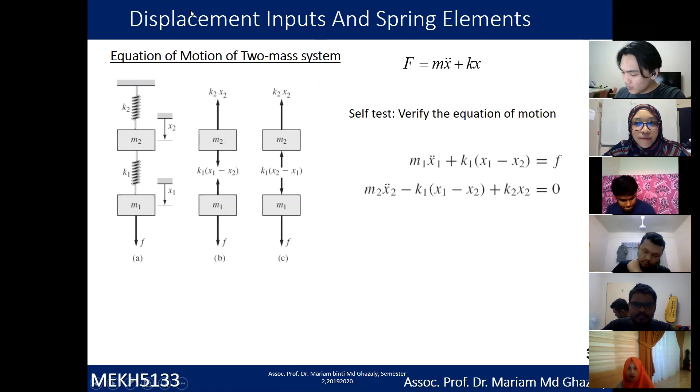Okay, since just now some of you commented that you already learned this in the previous class with Dr. Fiza, that's good. I will be very fast right now.

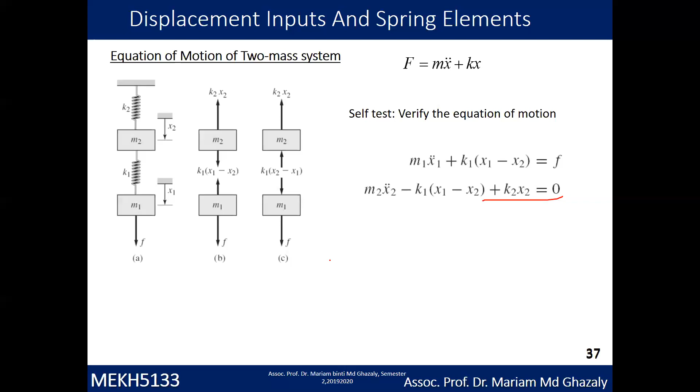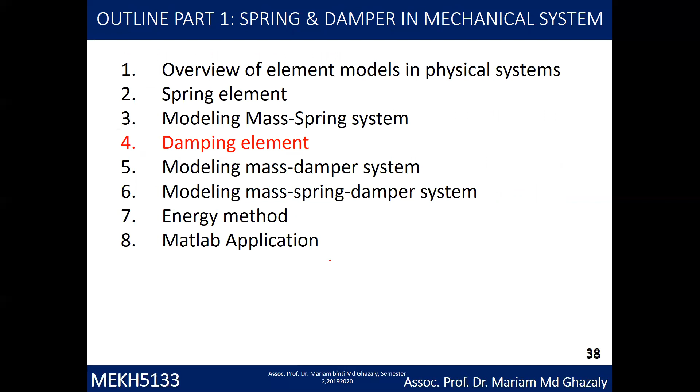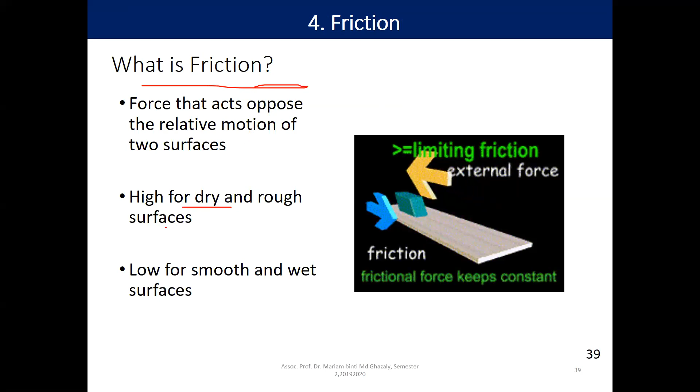Okay, so now we go to the damping element. That one just now was mass and spring; now we go to damping. But before that, let's talk about friction. What is friction? When you have damping, you actually have friction, because when an object is moving, friction slows down the object's motion—that's what we call damping. It's a force that acts opposite to the relative motion of two surfaces, whether dry and rough, or smooth and wet. So let's say you have this mass object M, and you apply a force in this direction; the opposite of this applied force is the friction force.

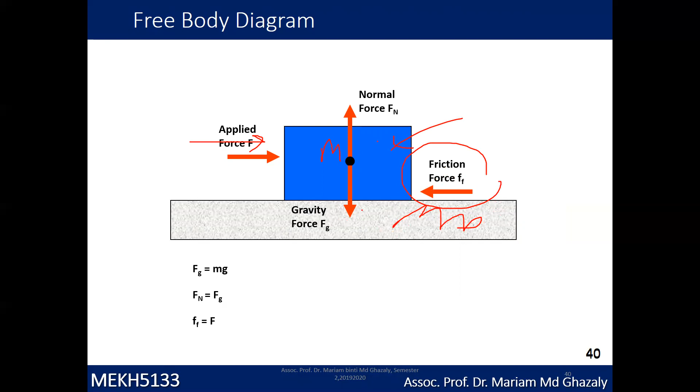Normally when you model this equation, you have a mass and a base, and we normally assume that friction is 0. But in reality you have the damping value, which is the friction force, along with the normal force acting upward and gravity acting downward. To calculate the friction force, Fs equals Fn, the normal force, times mu s, where mu s is the coefficient of static friction.

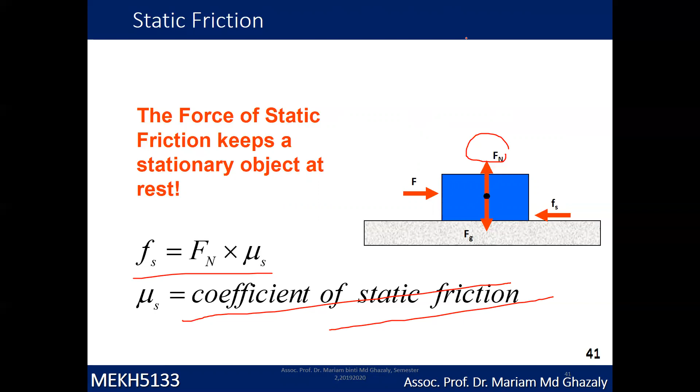So what is actually static friction? The force of static friction keeps the object at rest. For example, you have this duster. If you put it on the table, it's not moving because you have the static friction there. And in comparison, you have the kinetic force or kinetic friction.

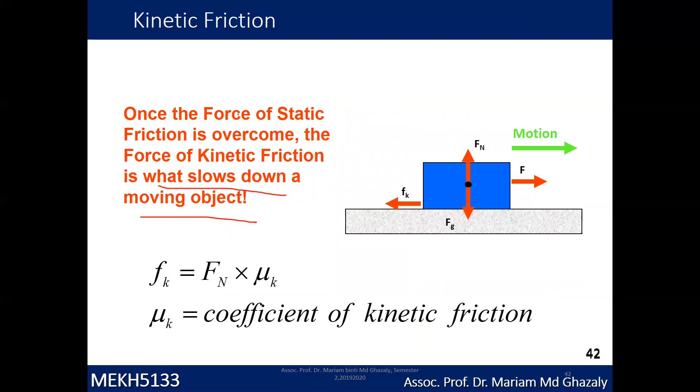Kinetic friction is something that will slow down a moving object. So, for example, you are doing a simple experiment right now. You have a box, you try to pull it. In the beginning, between the box and the surface, you have static friction. Then after you overcome the static friction, you have kinetic friction, which is when it starts to move.

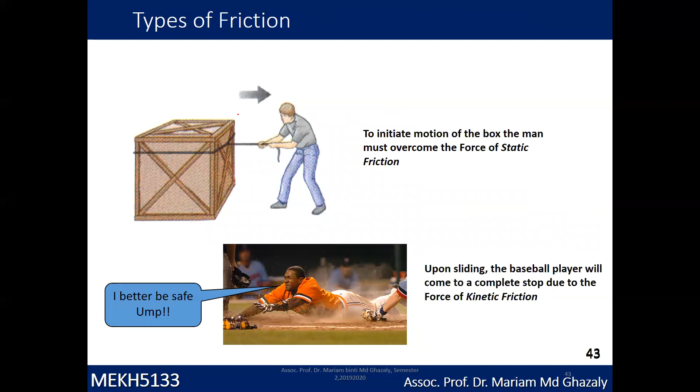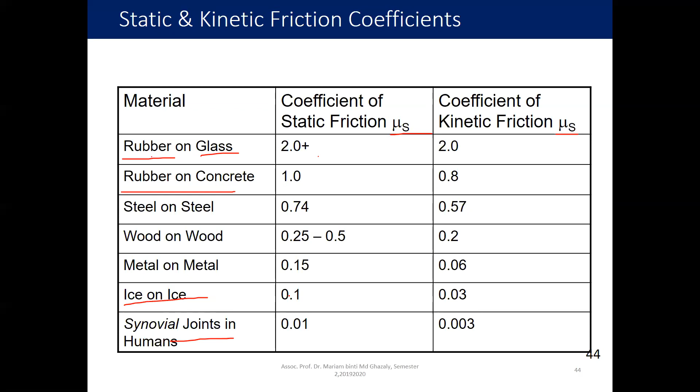Right, just a little bit of introduction. Okay, just tap that one.

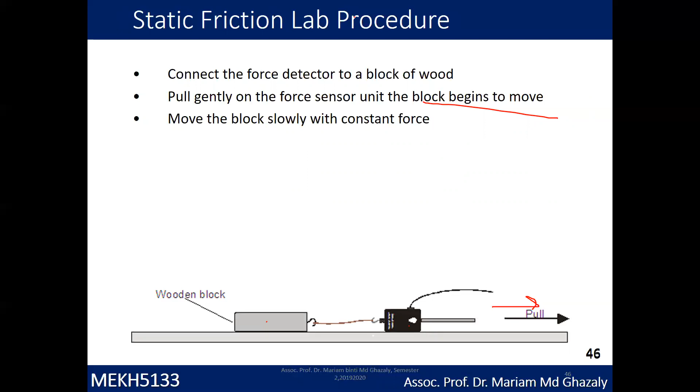So this is just a bit of procedure on how to actually measure static friction. You connect the wood block to a sensor, a force sensor. Pull the force sensor gently to the right side until the unit begins to move. So it means you pull it until it starts to move. Move the block slowly with constant force, until it starts to slowly move at a constant speed.

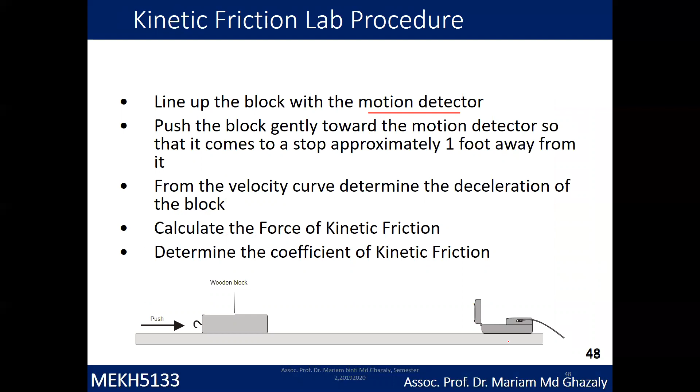So this is another way to find out the friction coefficient by using a displacement sensor. They use the motion detector to detect the speed of the block, and then from there you can plot the result and do some calculation to find the coefficient of friction.

Right, so for the damping element, I think I will go very fast - you can read it. This description: a damping element is an element that resists relative velocity across it. An example of a damping element is this piston. Normally a piston you either use hydraulic inside or you have air.

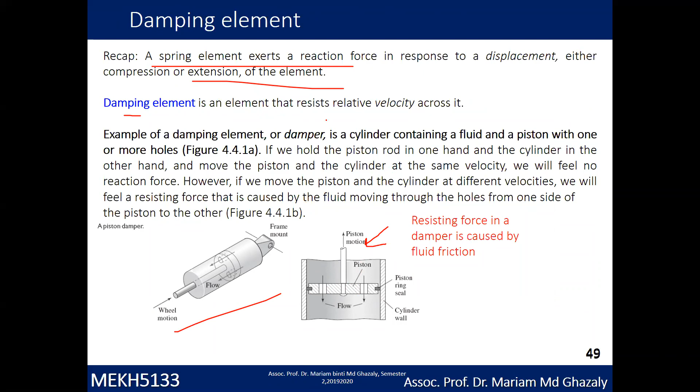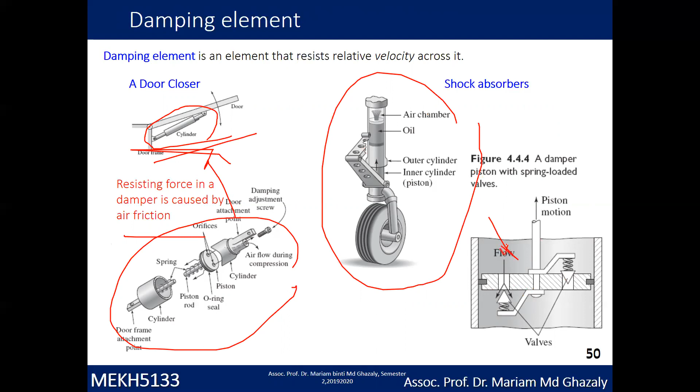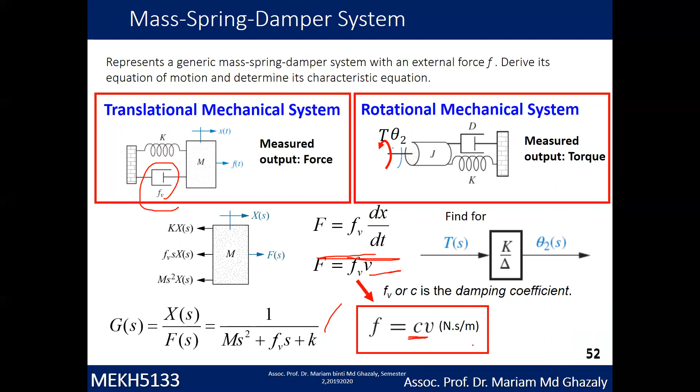So we have this equation, and from here we can actually write out the transfer function. And from here, if you take out this denominator and down here, you find this is the characteristic equation. From here, from the characteristic equation, you see that this is actually a complex conjugate root. Meaning that if it's a complex root, it's a damped sinusoidal function - meaning that if you give an input, it's going to have an oscillation before it settles down to the steady state.

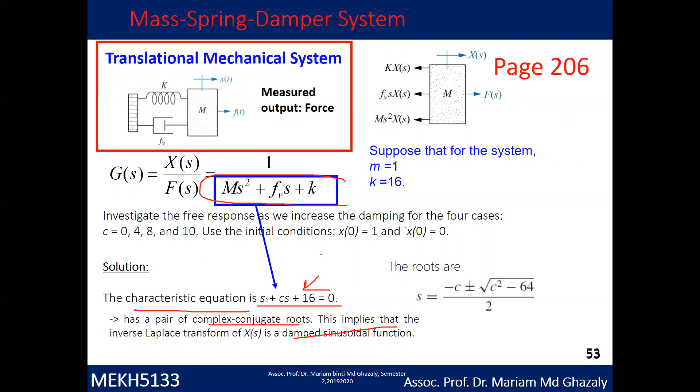So let's go to this example, I'll go very fast. So you have mass K and C, and this equation: m x double dot plus b, or we use c here,

cx dot plus kx. So you get its equation. From here you can rearrange it to get f equal to mx. So you will get the transfer function for the system, output over input, which is 1 over ms squared plus cs plus k.

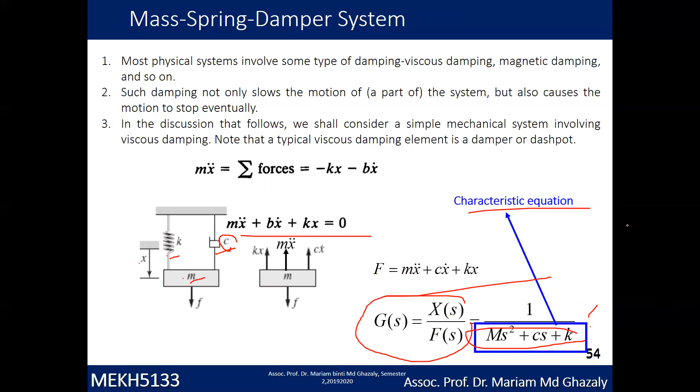So this will be the equation, and the denominator part is the characteristic equation, where you can see if it's going to have a damping value and so on. And this one will be the effect of gravity. When you have the effect of gravity, you have the theta value. So similar to the mass spring value just now, you can derive it.

Then you get this equation, mv dot, assuming that mx squared or mx double dot equal to mv dot, so you get mv dot. It's the same, I just write it in a different way. This one is in differential equation, this is in state space. So you have mv dot plus cv equal to mg sin theta.

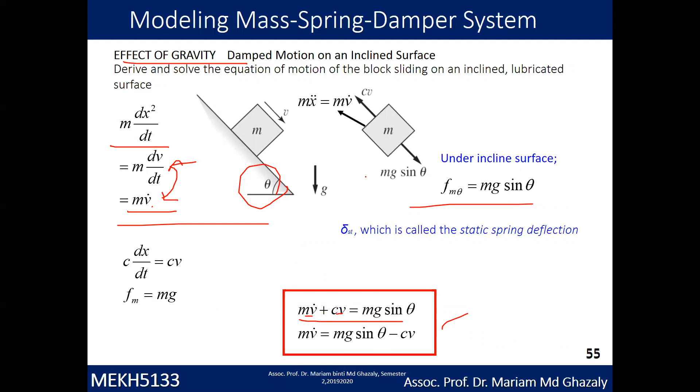Okay, for this transformation, let's go to this slide: effect of damping. So we are going to see what is the effect of damping to a system. Suppose that system shown below, m equal to 1, spring constant is 16.

Investigate the free response as we increase the damping for 4 cases. So C value is not given here, C equal to 0, 4, 8, 10. It asks you to get what is the response based on different C value. The initial condition given is x0 is 1 and dx over dt is 0.

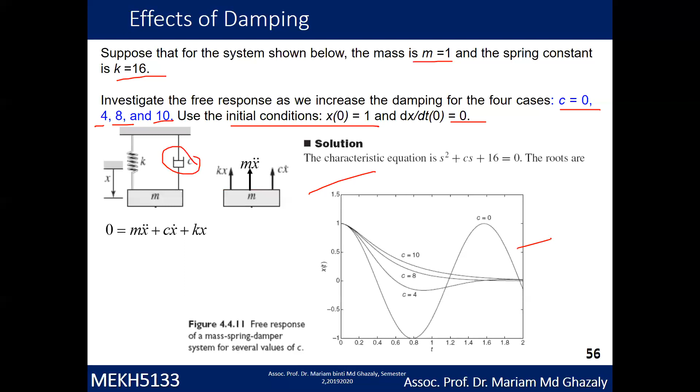So how to answer this question, this is a graph, but before we look at this graph, let's do the derivation first. By using Laplace transform and property of Laplace, you have learned with Dr. Norfiza about Laplace transform, right? So first of all, from this equation, we continue here: x double dot plus c x dot plus 16x equal to 0.

Then using the property of Laplace. So this is the property of Laplace, look at this: this is x double dot, so x double dot is this one. Substitute it: s squared xs minus sx0 minus x dot at 0, plus c value, c x dot is this one, so x, c s x minus x0, plus

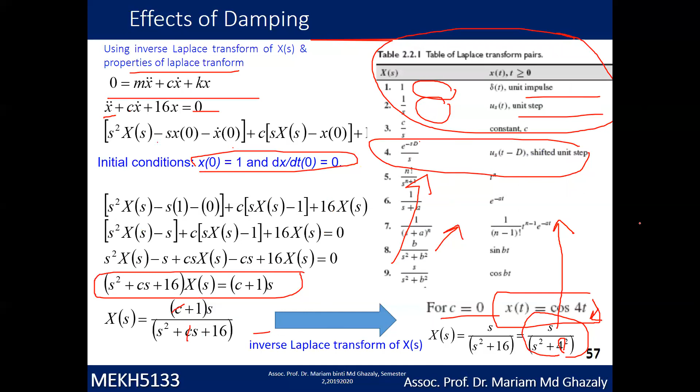So do the rest: 4, 8, 10, substitute into this equation. Okay, so now after doing that, you will see that this is c equal to 0, c equal to 4, c equal to 8, and c equal to 10. Meaning that when you have no damping value, it's going to oscillate much. When you have a damping value of 4, 8, 10, it's going to oscillate, but it's going to go to equilibrium position.

You see that for 4, 8, and 10 it's going to the same equilibrium position, meaning that the mass takes longer to return to equilibrium because the damping force greatly slows down the mass. So for the case of C equal to 0, actually it's going down a bit here, a bit late.

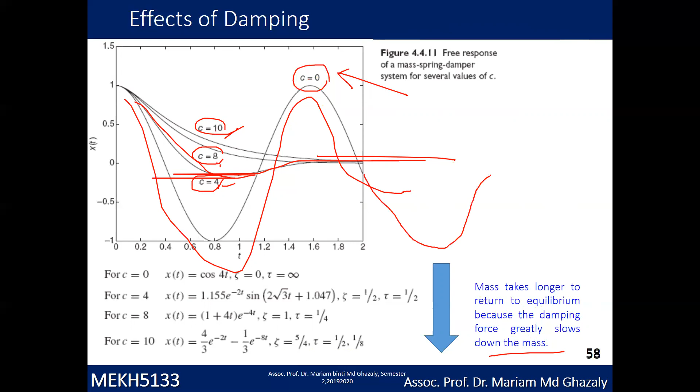Okay, this one is another example. You have a system, you have mass, K1, K2, and then you have a damper. The damper is connected in series with K1.

Okay, don't panic. Just look at the equation, try to do it similar to what you did before. First, write out the equation at M: F equals mx double dot plus cx dot plus k2x, blah blah blah and so on. So you will get the first equation.

Next is to get the equation with respect to displacement y. For displacement y, you have cx dot minus cy dot minus k1y equal to 0, because there's no force at this point. So you will have the second equation, y equals cs over k1 plus cs, times xs. Substitute this y into the first equation and you will get this equation. This will be the final equation for x over fs, because the question asks to determine the transfer function xs over fs.

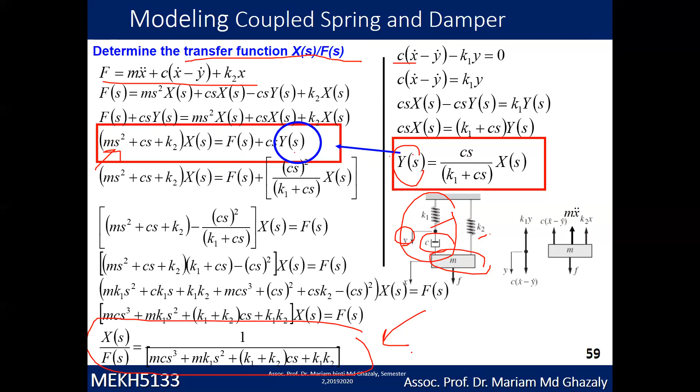Okay, everybody is so silent, so I'm not sure if I'm talking or anyone is there. Okay, so next we go to this example.

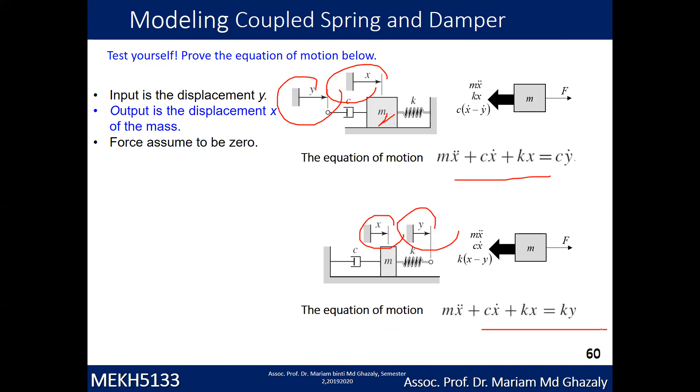So this one, just do it at home. Try to derive it. This one also, try to do it at home.

This is very similar to what I have drawn here. Just that you have an additional damper here. That's all. So just try to come up with the equation and try to prove that you can get this equation.

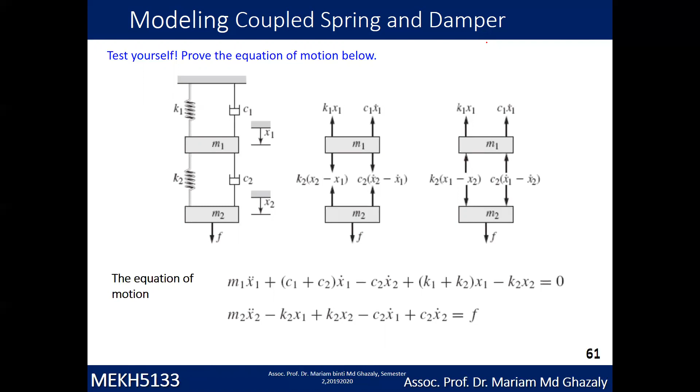This one is on linear motion. Now this is on rotary motion, translation motion. Similar, this example is from undergraduate.

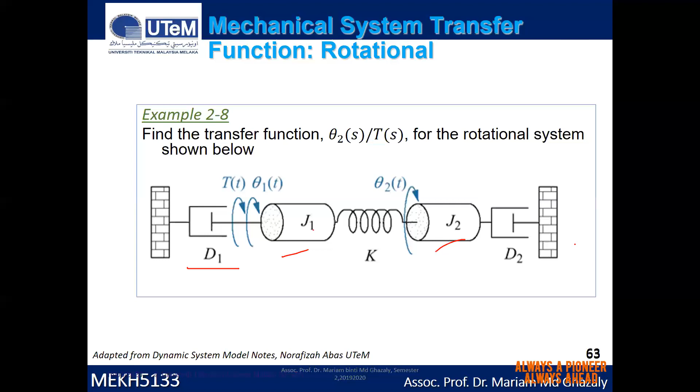So you have J1, J2, we have K connected in between, we have D1 dashpot and D2. Find out what is theta 2 over Ts. You can try to look at the example given here, how to get this equation. Then try to do it at home, and if you have derived it, you can show it to me later on.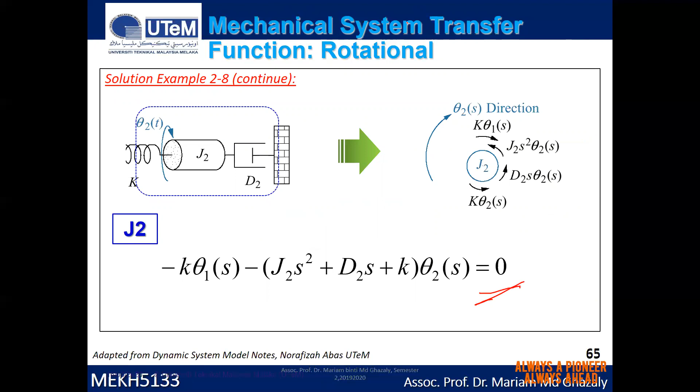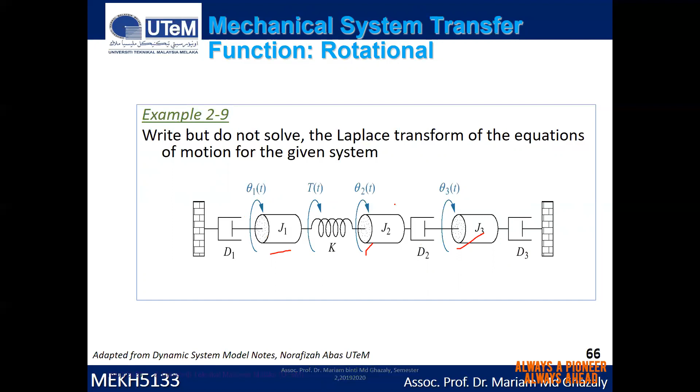This is an example with 3 inertias, J1, J2, J3. Find what is the equation for each. So basically you have three different equations based on theta 1, theta 2, and theta 3.

Very fast. This one is to show the effect of damper location and the numerator of the dynamics here. So let's see the first example. You have M, mass here. You have K and the damper connected to the same side, which is on the left side. So you have X displacement, Y is displacement here.

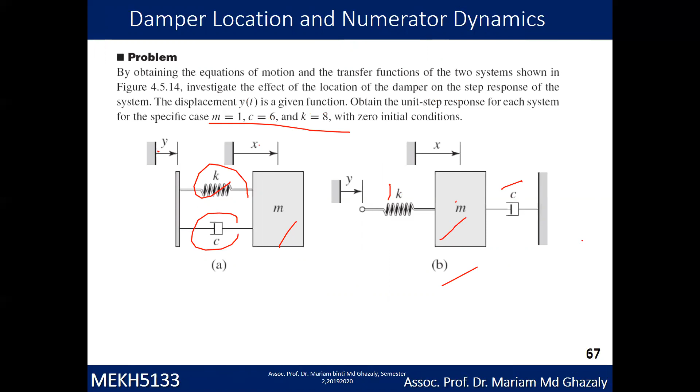In contrast, in this second example you have mass, K on the left side and damper on the right side. You're given all the values M, C, and K. So find out what is the unit step response for each specific system. What's the difference? What is the output that you will actually derive from these two systems? It looks similar, but you will get different responses.

So the first one, derive this, you get this equation. This is the equation that derives CS plus K over MS squared, blah blah blah. Substitute the values here, you will get this value, and then using partial fraction, remember partial fraction, you will get this equation.

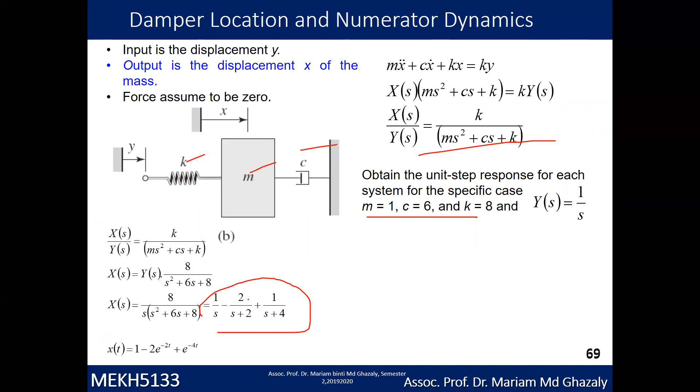So this is the equation for this block, right? Second equation is that when you have mass, k is on the left side, damper is on the right side. Get this equation, okay? Substitute value for m, c, and k. You will get this. Using partial fraction, you will get value for a, b, and c. Then using inverse Laplace, using the Laplace transform pair, you will get the value for xt.

Okay, so let's see what's the effect of having two different setups. For the first case, you have damper and k in the same side, so you will see that for the numerator part here, you have cs plus k. But for the b part, you only have k value on the numerator.

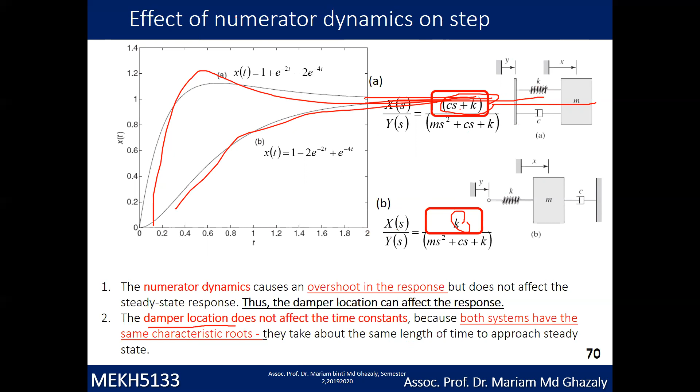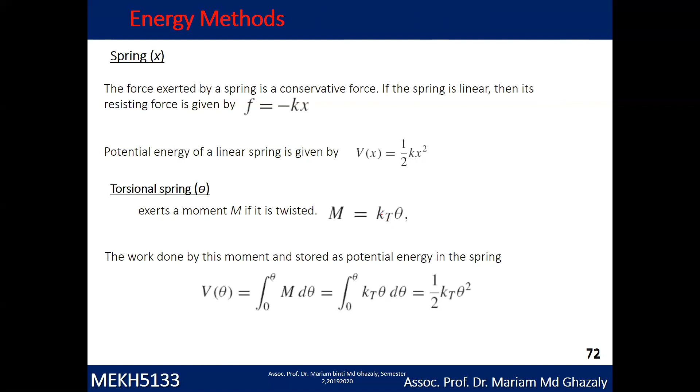So an energy method is - I skip this one because this one is not going to be in your final exam. Lastly is that MATLAB.

So MATLAB function, what is this? Okay, MATLAB, so this one is just a function. Those who already used MATLAB before, you already know what is the plot, TF, transfer function, and so on. Okay, let's see this example.

So this example is: use the MATLAB step function to obtain a plot of free response of the following model, where x0 is equal to 4, x0 dot at 0 position is equal to 2. Okay, you are given this equation.

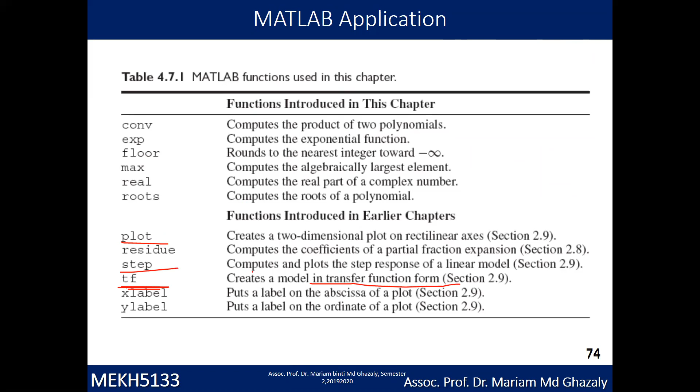And then step system is, look at this, step is compute and plot step response of the linear, because the question was to actually plot the step function. So step system - right? So if you do this exercise, you will actually get this graph, meaning that this transfer function is given by this equation.

Okay, so this one is an exercise that you need to do at home. Determine the free response with MATLAB. So by referring to the previous slides, find out and obtain the plot unit response of x2 for zero initial condition, and B, use MATLAB to obtain the free response using x1.

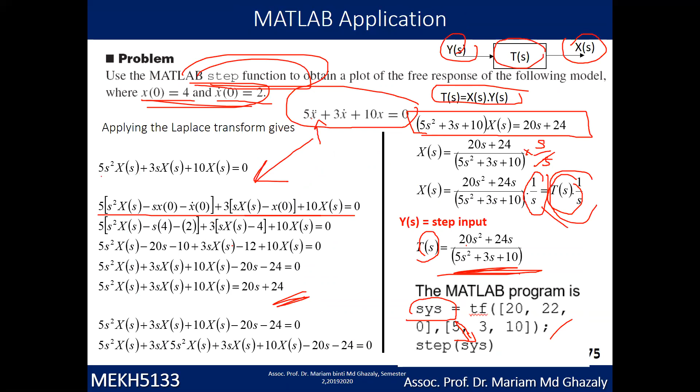First of all, let's get the equation for the system, and then after getting the equation, substitute the value for initial position x0, and get the transfer function. Using the code here, or you can use the same example, plot the transfer function.

Okay, so any question? That will be all for this part 1, spring and damper. Any question before we end the meeting?

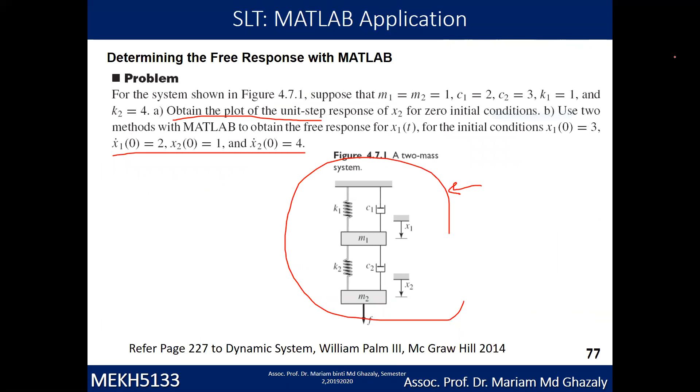Madam, Wednesday do we have session? Tomorrow morning. You want morning class or afternoon class? Up to madam. Afternoon class, okay, like this. I'm planning to actually do our class this week 3 times, meaning one session for one chapter. So today is for part 1, tomorrow will be for electric and electromechanical, and the third one, Wednesday, will be on thermal and fluid.

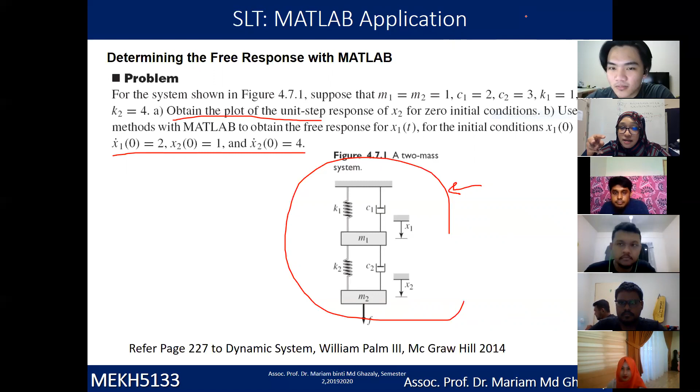Okay, so 3 days. Tomorrow, if you're okay with it... wait, let me check my calendar. Tomorrow afternoon, class at 2, is it okay? I guess morning is better if you can do morning. Who can do morning class? Raise your hand. Morning I'm okay, morning class, I'm okay, I'm okay, raise your hand.

I don't mind. Afternoon class, raise your hand for afternoon class. If morning class, tomorrow's slide, I think not much good. And I think most of you have background in electrical, right?

Yes, electrical, right? So tomorrow, if we want to do morning class, since you guys don't have anything to do, if you don't wake up in the morning, what do you do in the morning? So we try to do the class at 9:30, is it okay? Okay, 9:30, no problem, until finish. Maybe we finish at 1 or 12:30, depends. Okay, so 9:30 tomorrow, we meet again. I think using the same link.

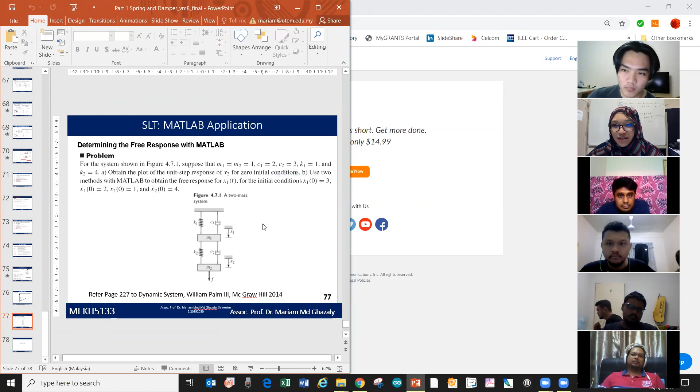How do we submit the calculation for this? This means for this exercise, make sure that you do the calculation. You don't need to use the equation editor, just write it out and then submit it. Hard copy is okay, scan it and email to me. Okay, my email is mariam@utem.